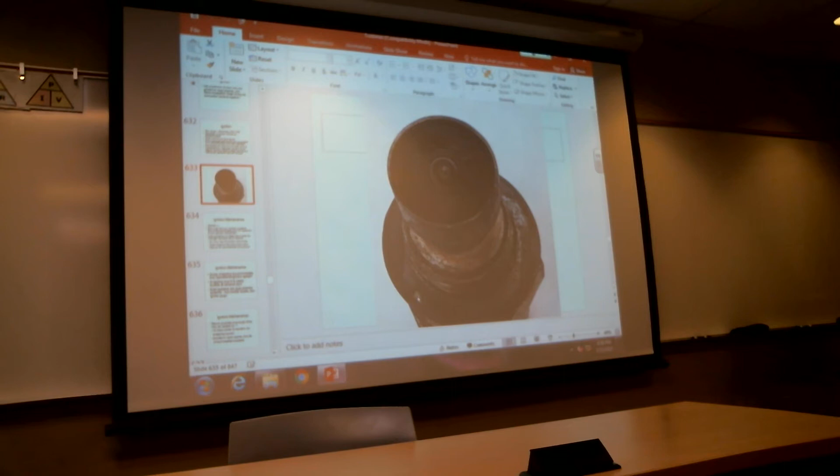They have this thing, some kind of a nebulous thing they call a punch list, and the punch list is all the little loose ends that didn't get done. And then we have a fire detection and smoke detection system in there that we can't control. We kind of need to, because I don't want to have the big red truck showing up every time we run an engine out there.

So we gotta hang a vest sock over it every time? Spray some jiffy foam over the sensors or something. I don't know, but they're telling me I have to call the dispatch people every time we run the engine, and I said that ain't gonna work.

So that's one of the problems we still got dangling with the test cell, but otherwise it looks like it's pretty well done. I'm anxious to get out there and kind of raise hell with it a little bit.

All right, so the last time we met, I had you think about this a little bit. It's good, I guess.

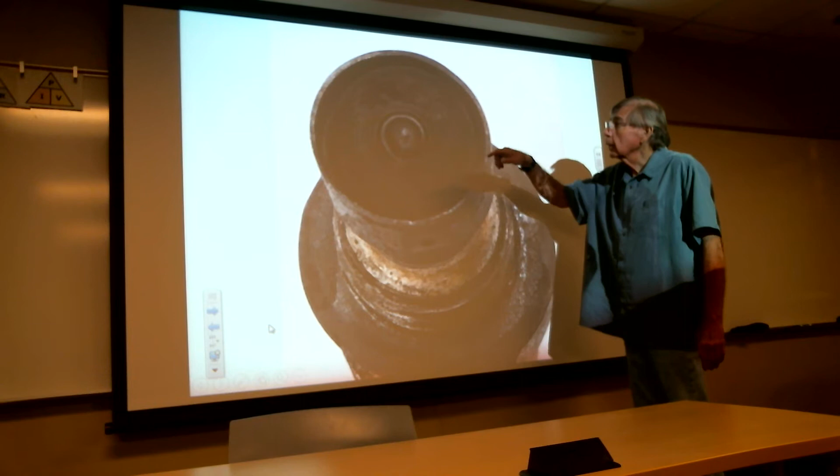So this is kind of like a cigar lighter inside your car. Push the thing in, it gets hot, pops out, and this whole coil here gets hot. These things get almost white hot, so they get a little bit hotter than the ones in your car.

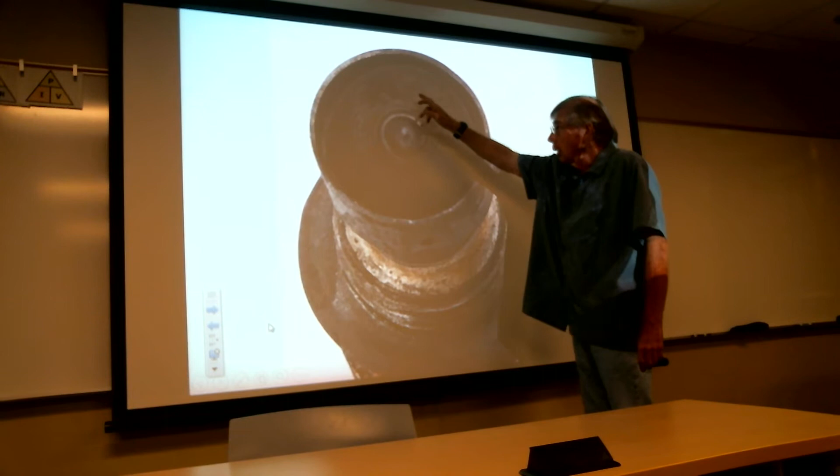But you can see the carbon up here, and this is just the solids in the fuel that eventually build up on there. It's kind of like I use the analogy of my oven at home. You cook a couple of chicken pot pies in my oven, and pretty soon it looks like that.

And so we have to get that stuff out of there, or you leave it in there, one or the other. And I choose not to because it just gets worse. But what happens is the more you bake this carbon, the harder it gets, the more glass-like it gets.

So the only way you get it out of there is with a caustic compound, and Easy-Off oven cleaner seems to work pretty good for that. You can soak the end of it in here and use a very light brush to break it and get it out of there. You might also use something with a little sharp fine point on it to break that stuff out.

But once this starts shorting out and killing the heat that happens across these coils, you start losing the starting efficiency. Because what you're trying to do is heat up the air that goes into the engine. You're also trying to cause the fuel to vaporize when it hits that hot middle. So those two things, this thing needs to work pretty efficiently.

The price of these things, as opposed to an igniter, about $650 for this little jet. $650, and it's only like that long. We got two of them in our PT6 outside here, and we started all of a sudden having a problem getting the engine started. Pulled these things out and found they were full of this carbon.

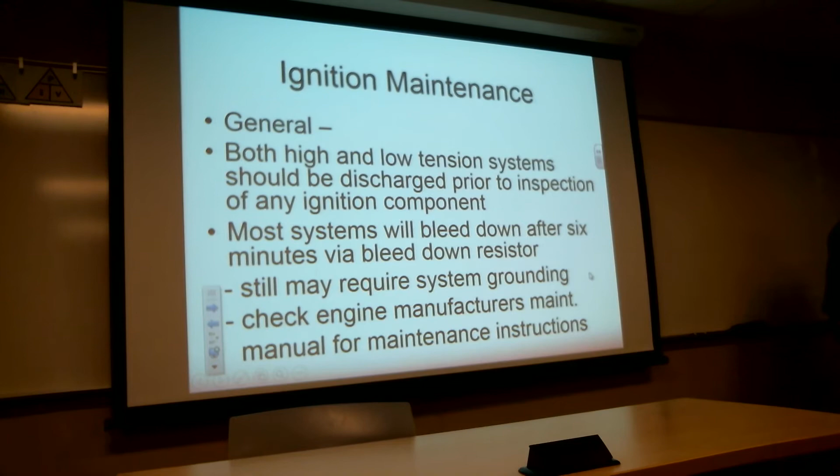So you always have maintenance manuals. Most manuals have a paper copy around somewhere, but most everything is also on hard drives or CDs. A lot of shops have the whole stack, with a CD player that takes 6 or 8 CDs. You just feed in the appropriate discs for the aircraft or engine, and you can jump between pages, usually with 2 or 3 monitors.

What you're looking for with igniters—our PT6 doesn't have the snapping sound, but normally you'll hear that snapping sound in the tailpipe. That ensures you know a spark is occurring in the back of the engine. You can hear it from the front too, but you're trying to listen through all the compressor blades and the rest of the engine. If you listen from the tailpipe end, you don't have all that stuff in the way—it's usually just a couple stages of turbines and a big can that echoes in there, so it's instantly recognizable as a snapping sound in the ignition system.

Most of these systems—our little engines out here are only single channel—but most have dual channel systems. That may be one exciter box with 2 channels, or 2 exciter boxes with 1 channel apiece. It depends on the airframer and how they wanted to set it up for a given engine and airframe installation.

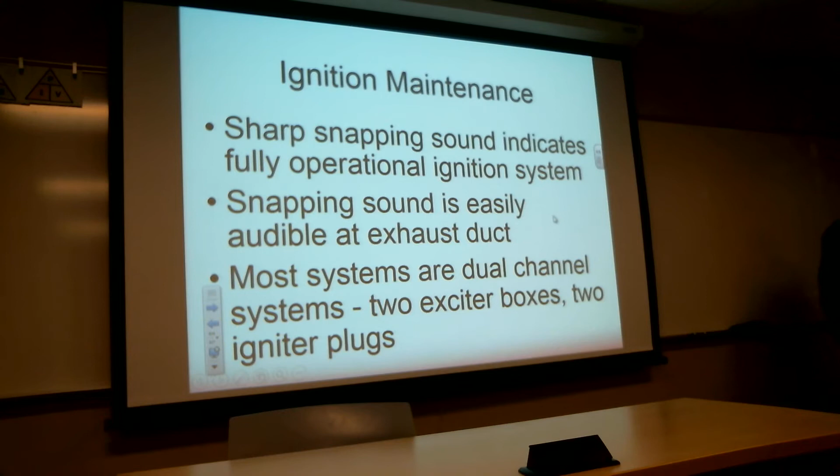Now when you troubleshoot these things, if you don't hear that snapping sound after ignition's been applied, you start upstream. First, is the breaker closed? Next, is the switch providing power to the exciter box? If there's no snapping sound, you just work your way downstream, following the power. If you don't have power to the exciter box, then you've got an airframe electrical issue, and you can track that down pretty easily.

But be sure the circuit breakers are set—you might want to pull the breaker out and reset it again. Breakers go bad. Pilots have a habit of fooling around with circuit breakers in flight; they like to pop them and stick them back in all the time. What does that do to the circuit breaker itself inside? How many of you have seen a circuit breaker taken apart? Okay, so explain to me what happens if you constantly set and reset a circuit breaker.

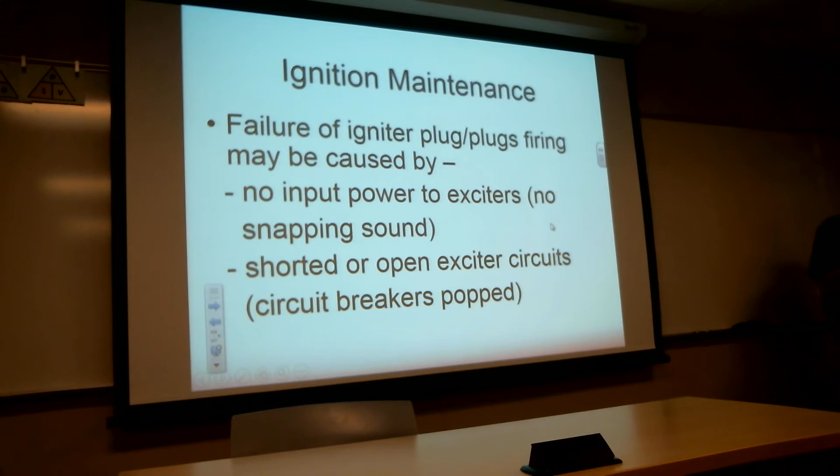But what's gonna happen is, one thing is you're gonna learn something by troubleshooting these things. You're also gonna save money by running these things to ground one issue at a time. And it doesn't take that long with this stuff. It all screws together, it's got nuts on it, and it goes together pretty easily.

All right, so the igniters. Again, the percentage of probability that you've got an igniter issue is almost 100%.

So you want to check those first? Well, you don't know if you've got power to the exciter, so check the breaker, make sure you got power to the exciter first. Yeah, so that'd be the first thing you do. The next thing then would be the igniter itself.

Of course, if you have a dual channel, one's working, one's not, swap them. And that's gonna tell the tale right there.

Now there's something else I should tell you about, it's called sunshine and fresh air. For no good reason, a lot of times you'll touch something, take it apart, it looks fine, and you put it back together, and it works perfect. A little sunshine and fresh air sometimes can fix a lot of things, but it's kind of maddening because these transient problems are almost certain to show up again at some point. So you haven't really fixed anything, but you made it work. So be careful doing that, try not to fall into that trap.

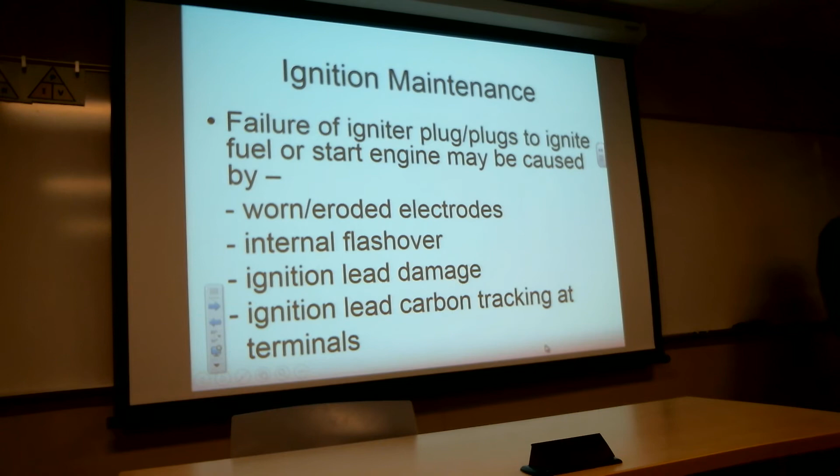Okay. So cleaning and inspection of the ignition ring. The output wells of the exciter, they have to be cleaned.

What would you use to clean this stuff? So you got a little grease in there. Maybe you went to Popeyes and had chicken for lunch and got greasy fingers that put all this stuff together. What would you use? What kind of compound would you use to neutralize the grease and get it out?

Alcohol? Alcohol, not so much. You can use alcohol, but I'll tell you what happens with alcohol as it flashes off and evaporates. What does it leave behind? Everything you just tried to get away, everything you're trying to get rid of. And even if you get it pretty clean, it's going to cause condensation, and you don't want moisture sitting there. You want to have it clean and dry when you move away from it.

So you can use acetone, MEK, electro contact cleaner, anything like that works just fine. Q-tips, you all know what Q-tips are? Cotton swabs, clean your ears with them. So you use a cotton swab down in there with some of this compound, and it'll clean it right out.

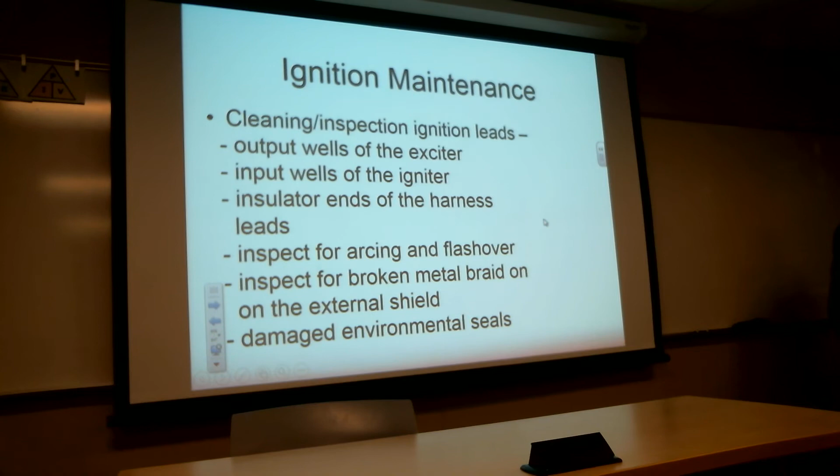Now the exciters and the harnesses, there's nothing there that's repairable by mechanics except by certified repair stations. They take these things apart, put them back together, replace the parts in them, overhaul them, all of that, but there are no line replaceable units inside of these things.

Okay? Keep your damn screwdrivers out of them.

So the igniter plugs, they're replaced when they're worn or no longer functioning. Usually, if there's a dual channel setup on the engine, they'll run them right till one quits, and then they'll replace it. They won't replace them in pairs. They'll run them until one quits, and then they'll let the other one quit in due time.

Again, the wear and erosion limits are set by the manufacturers of not only the engines. You'll find these repair schemes or the limits, also in the component maintenance manuals. So Unison, Champion, Autolite, all of those companies make these igniters, and they all have their own specific limits for wear and usefulness.

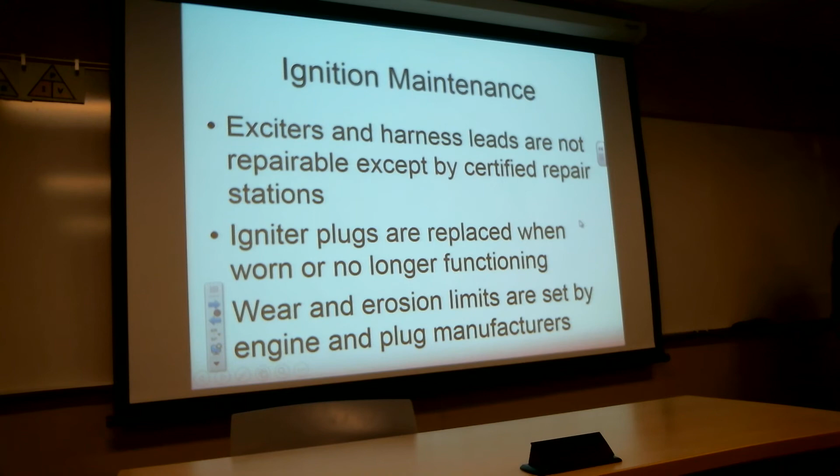Okay, glow plug maintenance. The only way you can check to see if the glow plug's working, since you can't hear it switch and snap, is to pull it out and connect it to the wire.

Now, these aren't going to have a wire that looks like a harness wire for a high tension or low tension spark plug. This is just typically going to be a shielded wire, 18 gauge, maybe 16 gauge, that goes out and feeds voltage to the glow plug. And it comes from a glow plug controller. So the controller switches on, and it will run the glow plug for a period of time.

Everyone's a little different, they'll run it for 30, 40 seconds, and then shut it off. It'll go off for 30, 40 seconds, and then come back on again, and that's called a duty cycle.

Okay, so you remove the plug from the engine, and then you reinstall the ignition lead and switch on the ignition with the plug hanging outside the engine. So all you're going to be looking for is to see that the plug operates.

Okay, so these things should get hot within about 8 to 10 seconds, and then you shut it off. You don't want to run these any longer than you have to. These things will get almost white hot, but you don't want to run the temperature that high.

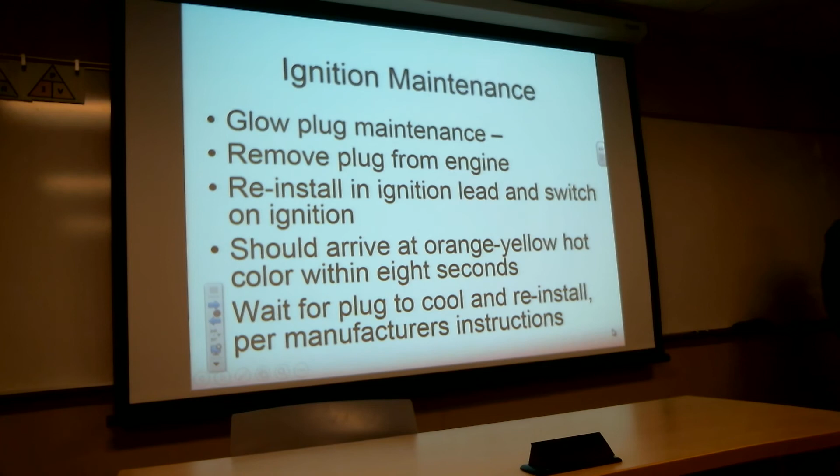Okay, the last slide here. I'm going to show you a little video. Did I show you guys a video in the ignitions class the other night, CFM56? You probably remember. I'll go dig that out real quick, and I'll show you a little video before we close it down for a little break here.

So the point here is that if you drop one of these spark plugs, and these are the igniters, not the glow plugs, if you drop one of these things, you're probably going to have a problem with it down the road. And if you have a problem with it down the road, that means the aircraft's probably not going to launch on time. You take one of these things and it hits the floor, you might as well just scrap it. Okay? They're expensive, but you might as well just scrap it because there's a very good chance the insulator has been cracked inside the spark plug.

And it's the same with a spark plug for a reciprocating engine. It doesn't matter. What's going to happen is if you crack that insulator, you're not going to have the correct voltage delivered to the electrode to create the spark that you're looking for.

Okay. So let me go get that video, and I'll run that off real quick. It's like 20 minutes or something, maybe less. But it's about the CFM56 ignition system.

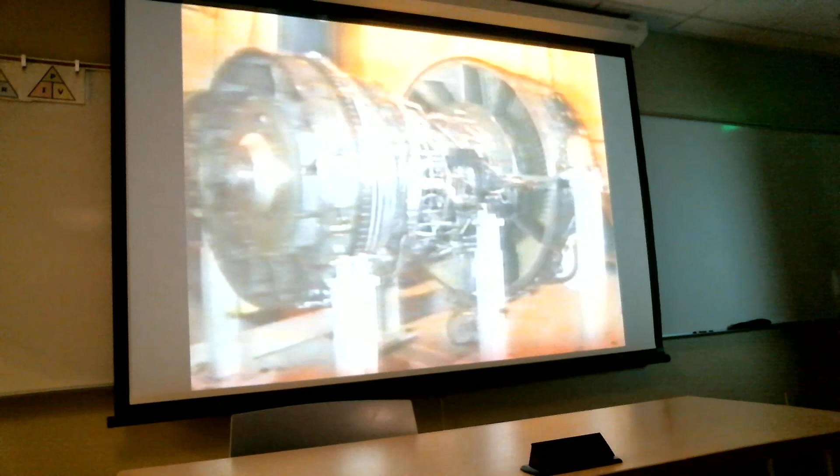These engines are in quite a number of Boeings and Airbuses, almost all the 737s anymore. This program details the removal and installation of the CFM56 ignition system. Both Type 4 and Type 3 will be described.

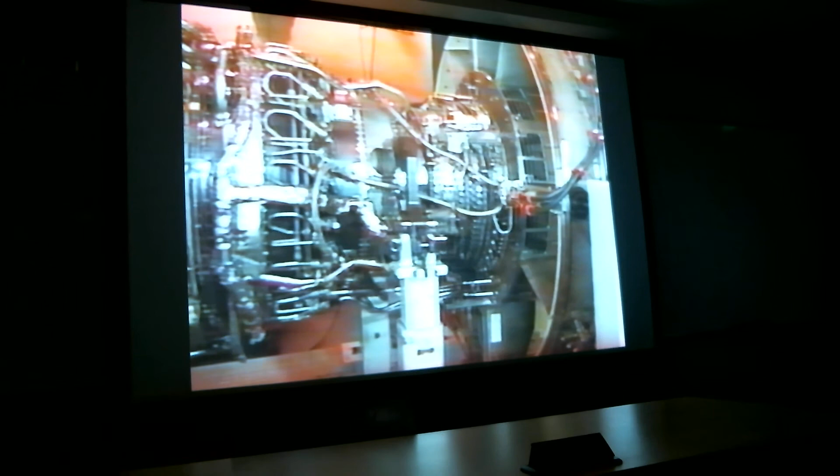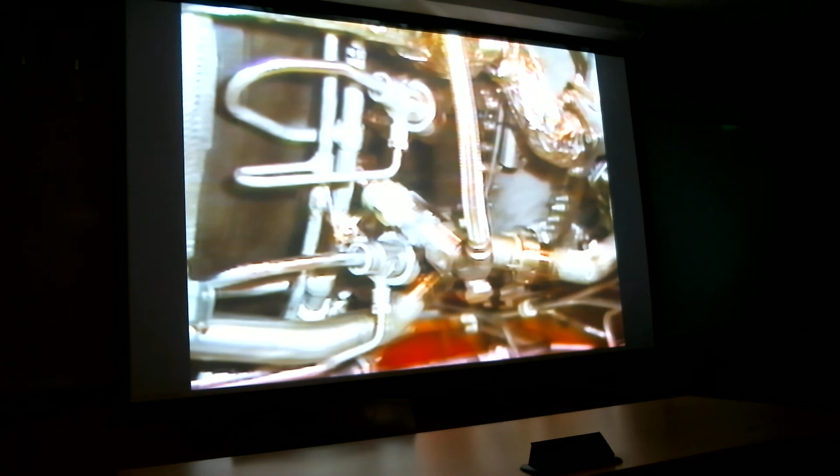Before disassembly, ensure the system has been deactivated for at least 5 minutes. Remove the cooling shroud clamp and the cooling shroud. Once the cooling shroud has been removed, the ignition lead igniter plug interface will be exposed. Then loosen the ignition lead coupling nut and completely disengage it from the igniter plug.

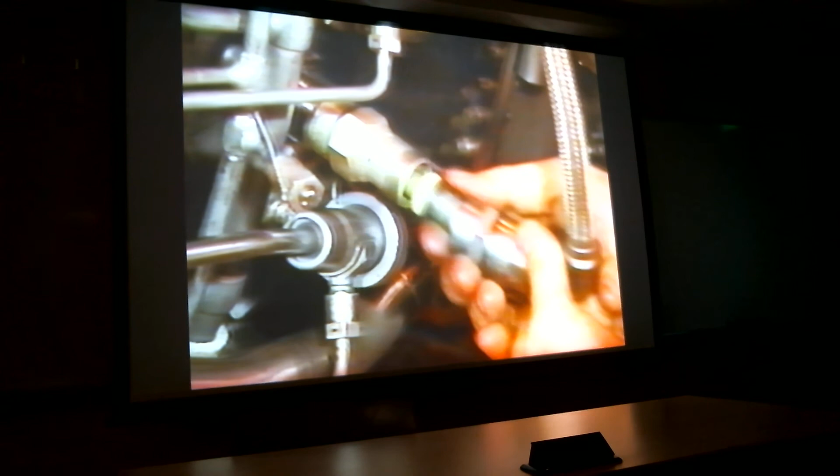Next, gently remove the ignition lead from the plug. Be careful not to bend or kink the lead excessively during removal, as this could damage the ignition lead or plug. Then, with the lead completely disengaged from the igniter plug, unseat the igniter plug from the Type 4 adapter bushing.

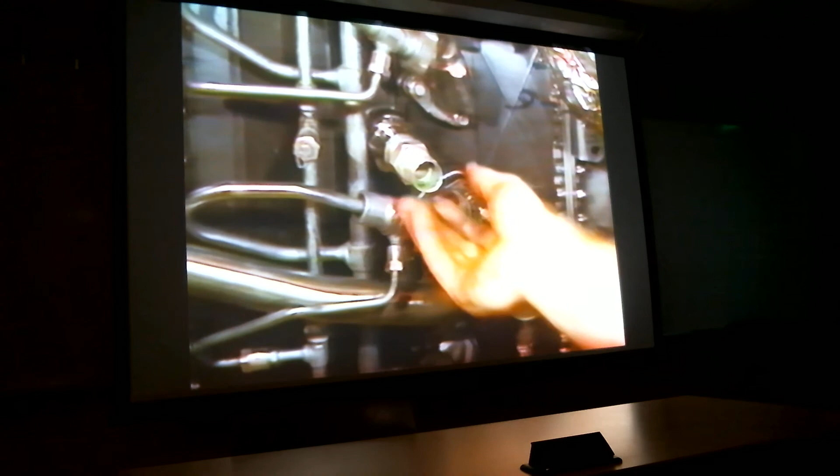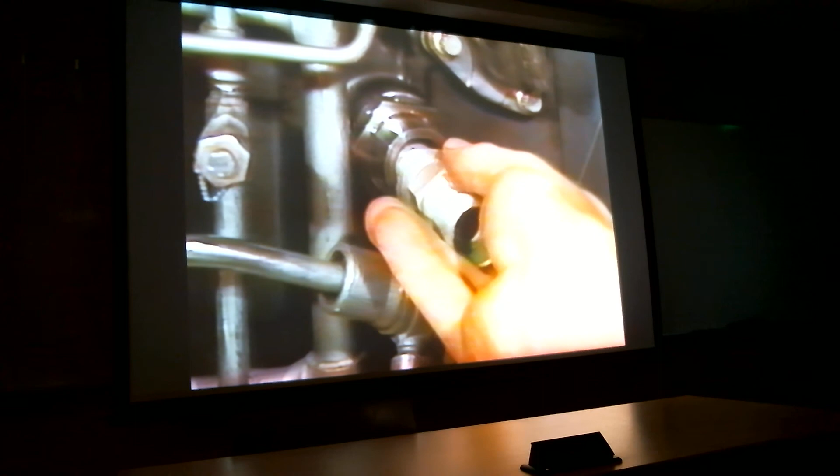Do not remove the Type 4 adapter bushing. It should remain lock-wired and secured to the combustion case. The Type 4 adapter bushing is only removed if the igniter plug cannot be unseated from the bushing. The original adapter bushing, along with the equivalent shims between the bushing and the combustion case, should be used, or igniter immersion depth will be affected.

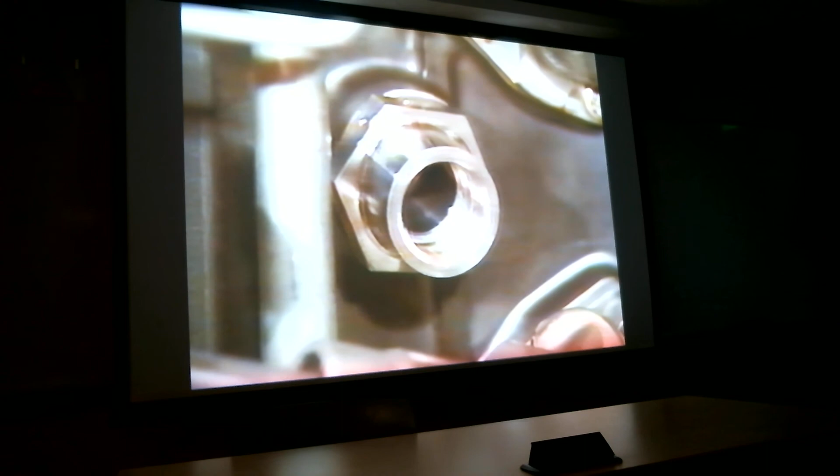Ensure that the gasket between the igniter plug and adapter bushing came off with the plug.

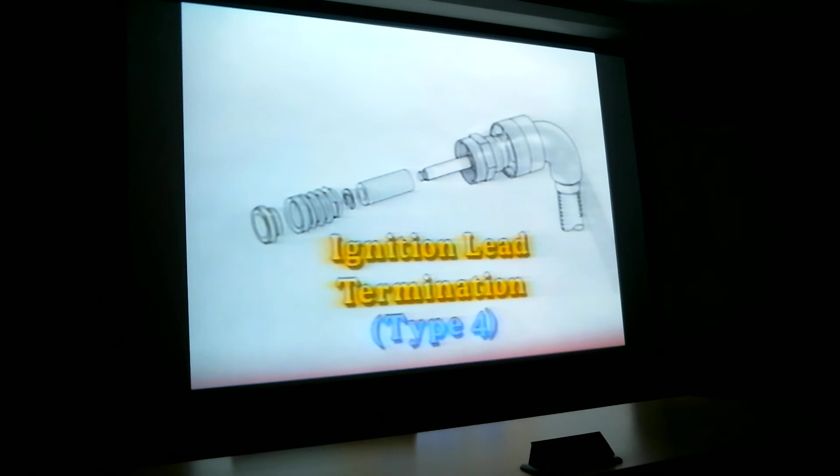Proper installation of the igniter plug is very important. Since it is a wear-out item, it is the most often changed ignition system component. This system can be assembled many different ways. However, only one, described later in this program, is correct and ensures proper operation.

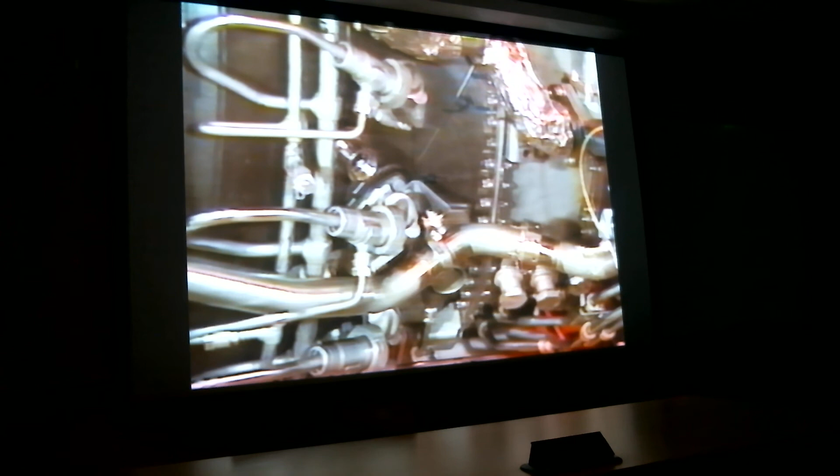Before beginning installation, have all of the needed hardware and consumables available: an igniter plug with captive gasket installed, a new chamfered silicone seal, and anti-seize grease. Be sure that hands, hardware, and tools are free from any dirt, etc. The conditions under which the ignition system operates make it extremely sensitive to any type of contamination.

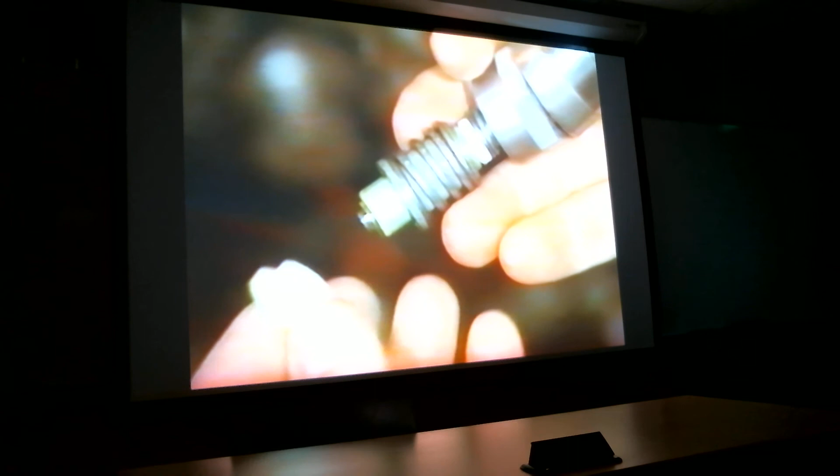First, remove the chamfered silicone seal from the ignition lead insulator, and be sure that the seal load spring remains in place on the lead. Then install the new chamfered silicone seal on the ignition lead insulator. Verify the proper orientation of the seal load spring and the seal.

Note: be sure to install the chamfered silicone seal before applying any anti-seize grease to ensure cleanliness of the seal and igniter terminal well area.

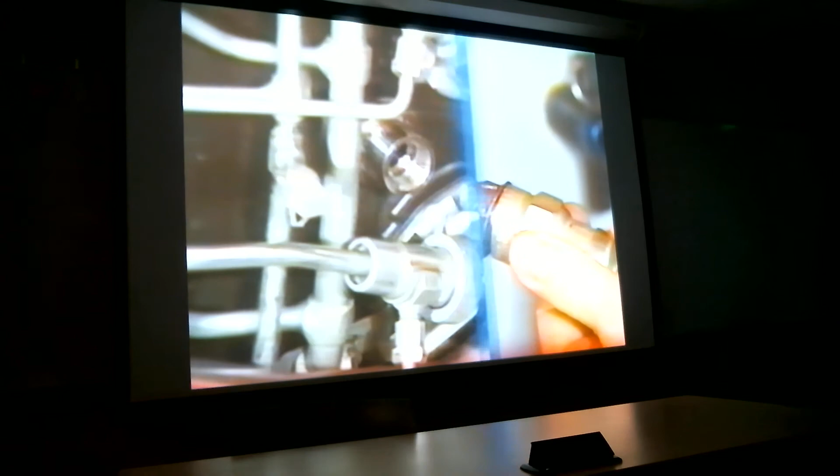Next, coat the threads of the igniter plug that mate with the Type 4 adapter bushing with anti-seize grease. Then thread the igniter plug by hand into the bushing until snug. Torque the igniter plug to the torque value specified in the maintenance manual.

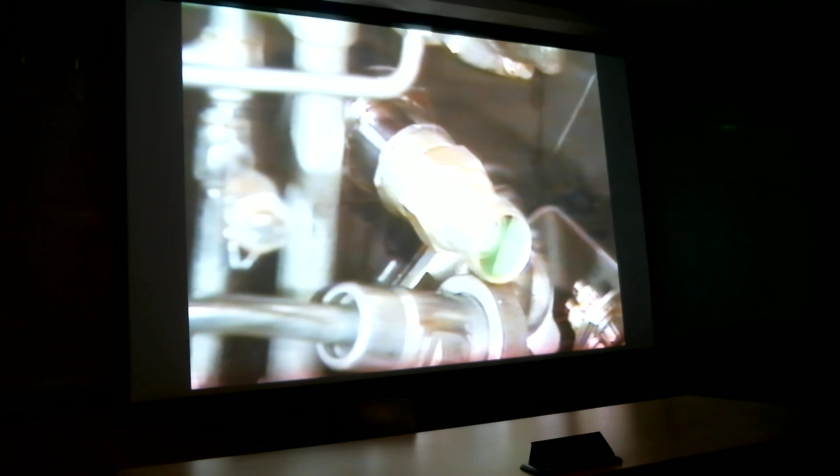Anti-seize grease is not used at the lead plug interface because of the threat of contamination to the Type 4 termination.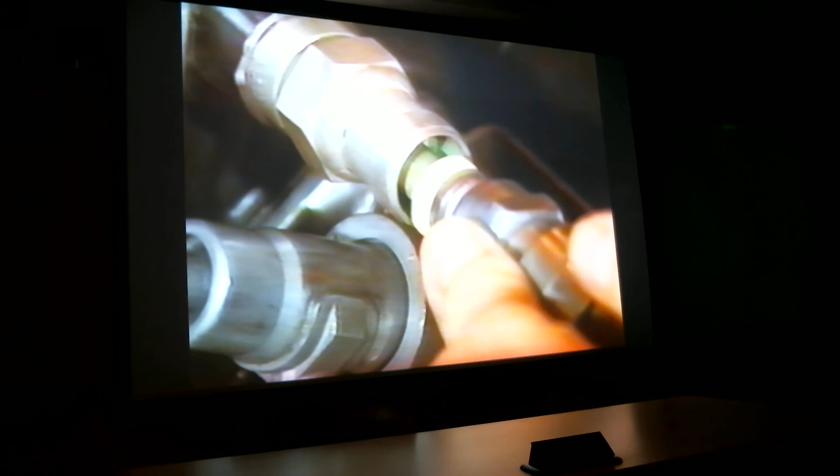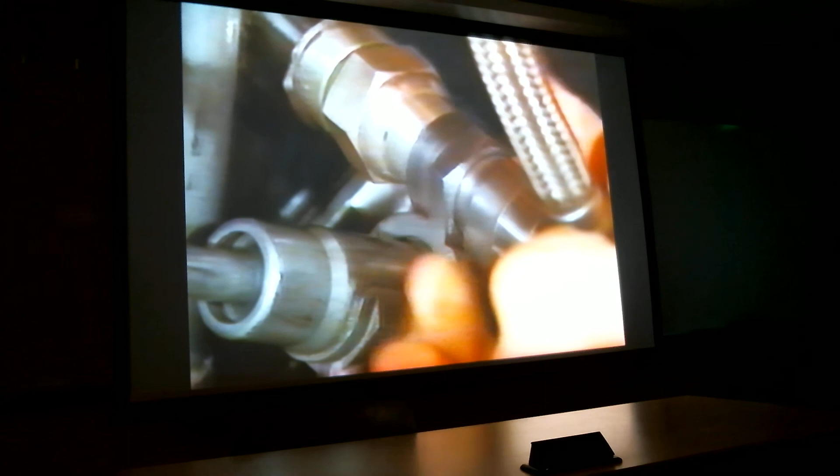Gently install the ignition lead into the igniter plug. Thread the ignition lead coupling nut onto the plug by hand until snug. Then torque the lead coupling nut to the torque value specified in the maintenance manual. Finally, install the cooling shroud and clamp into place.

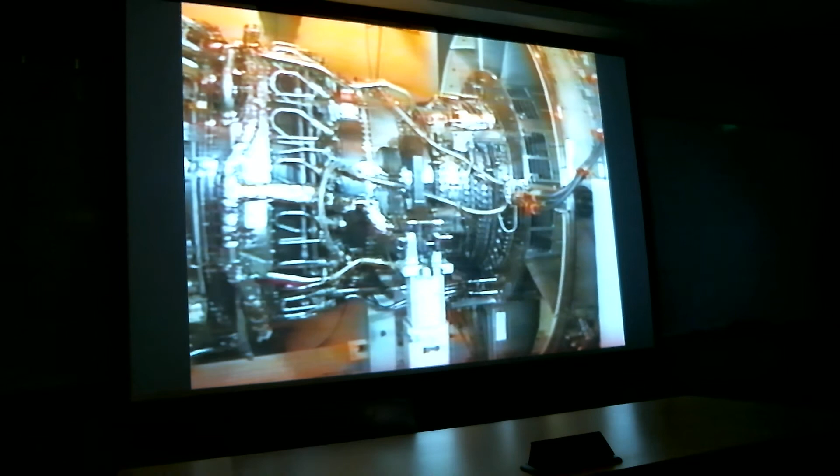For the removal of the Type 3 igniter plug, first cut the lock wire from the ignition lead coupling nut to the adjacent fuel nozzle. Unseat the ignition lead coupling nut from the combustion case and remove it completely.

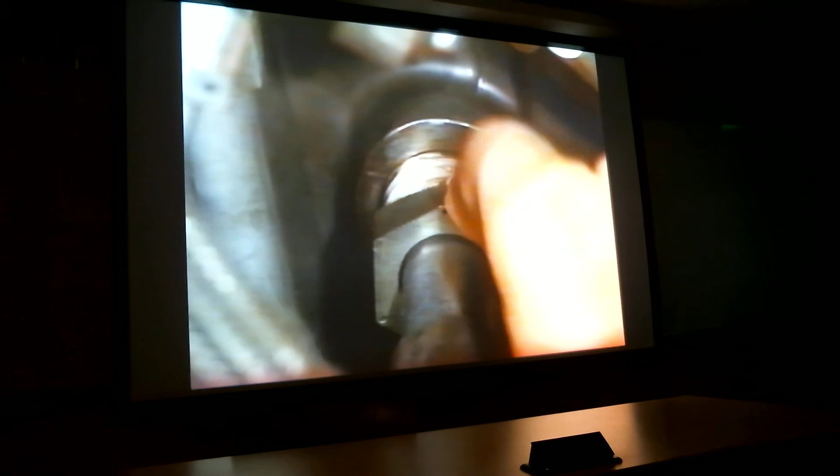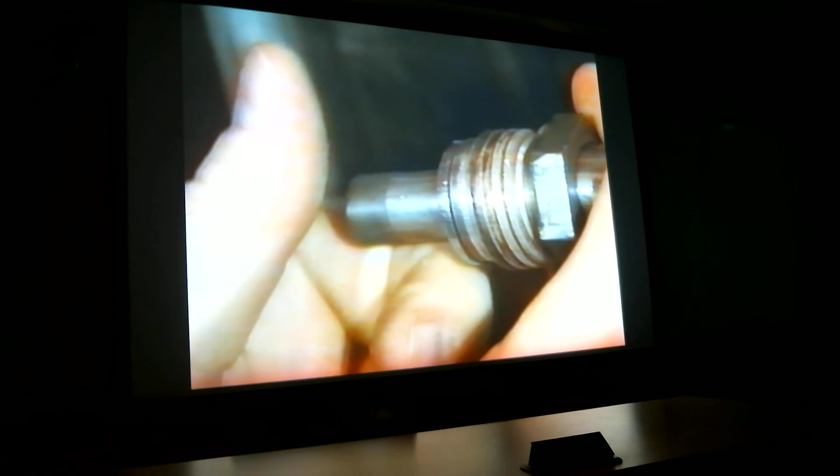Gently remove the lead plug combination from the combustion case. Be careful that the plug does not fall out of the ignition lead. The igniter plug is held in place by the friction force between the pin and socket connection. In the event of a plug or lead malfunction, removal of the igniter plug may be difficult. Further troubleshooting may be necessary.

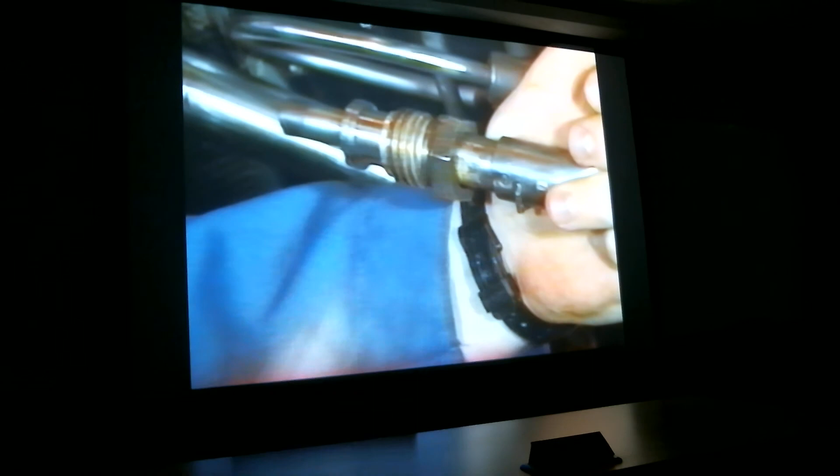Install the Type 3 igniter plug into the ignition lead and carefully coat the threads of the ignition lead liberally with anti-seize grease. Then install the ignition lead coupling nut into the combustion case and torque to the value specified in the maintenance manual. Then safety wire the coupling nut to the adjacent fuel nozzle.

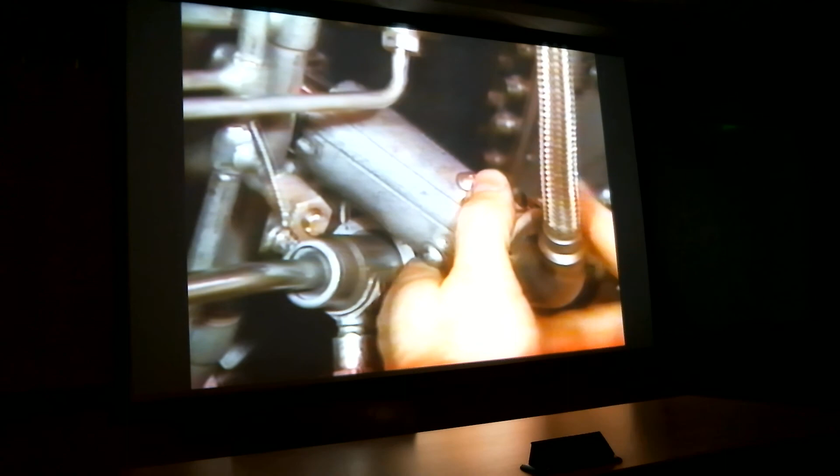For Type 4, remove the cooling shroud clamp and shroud from the igniter plug ignition lead junction. Then remove the coupling nuts on the exciter end of the lead and on the igniter plug end of the lead.

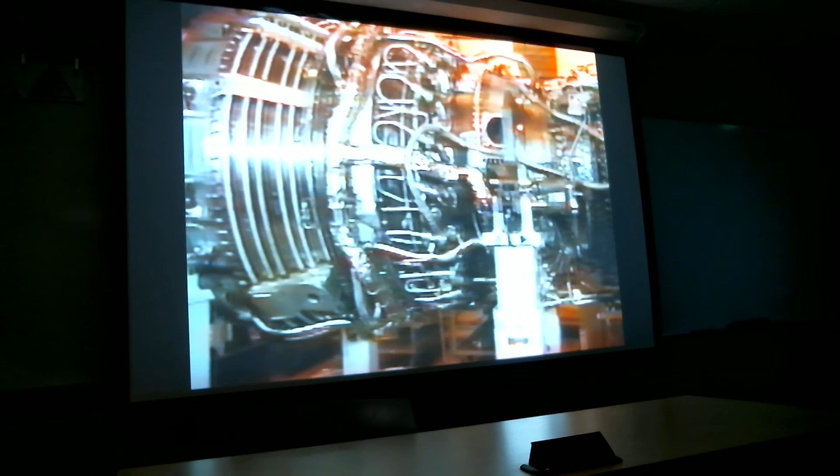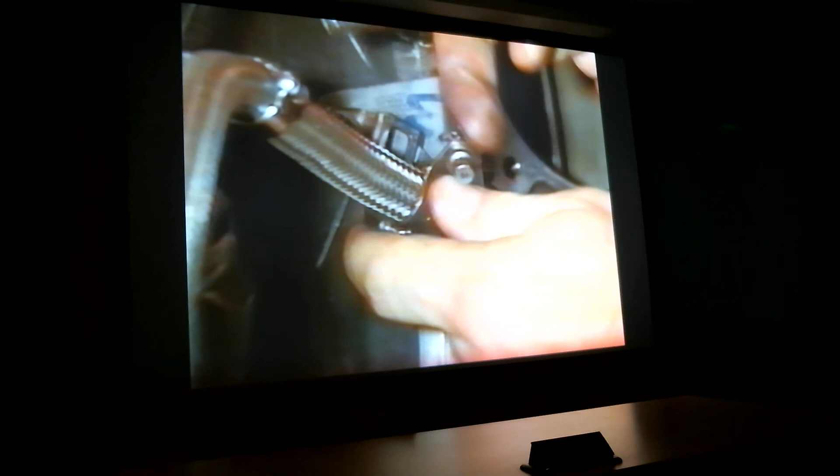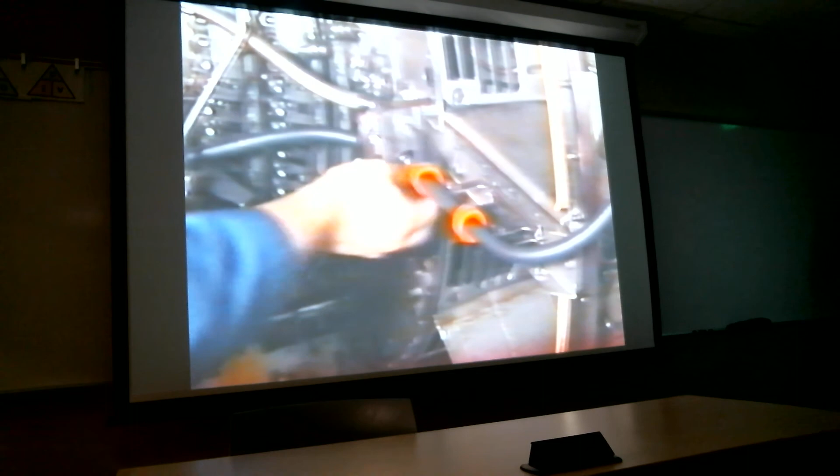Open all of the brackets holding the lead in place. Loosen and remove the bolts holding the cooling air pickup junction plate. Then carefully pull the ignition lead through the fan frame. The ignition lead can then be removed from all of the other brackets and removed from the engine.

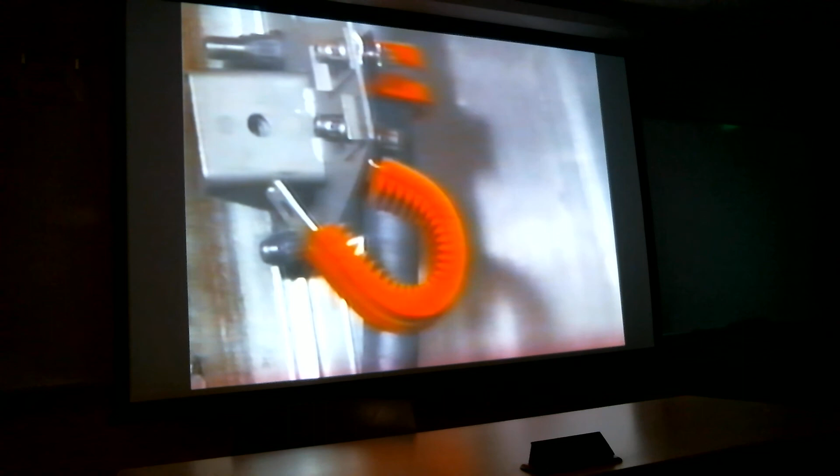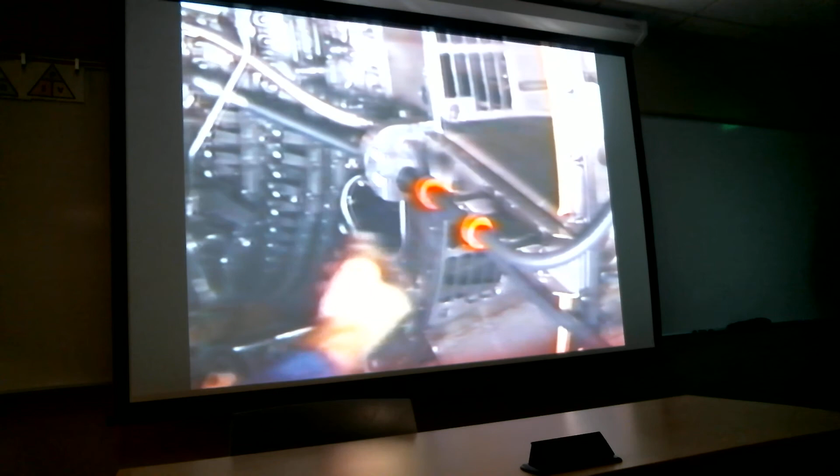When installing the Type 3 or Type 4 ignition leads, first make sure all brackets are in place and in good condition. Then insert the exciter end of the ignition lead through the fan frame strut and carefully feed the lead through the strut until the air adapter seats. Then tighten the clamps. Next, install the bolt and retaining plate that hold the air adapter in place on the number 3 fan frame strut.

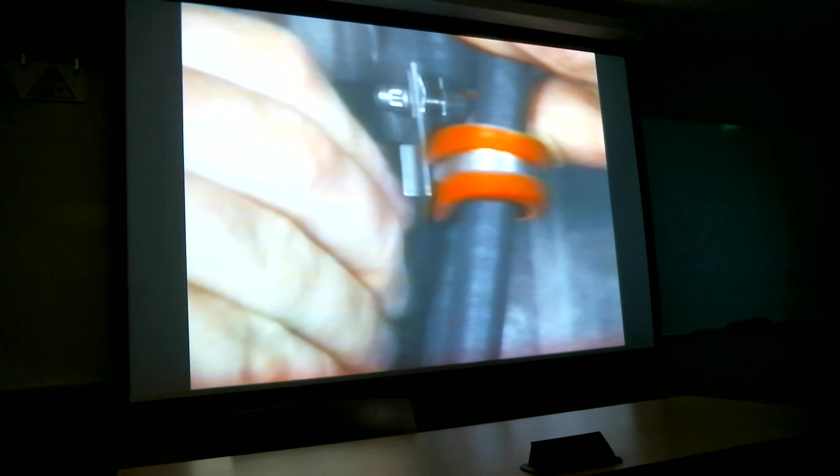Run the lead in the proper clamps as specified in the maintenance manual. Next, gently slip the exciter end of the lead into the exciter connector and torque the coupling nut to the value specified in the maintenance manual.

On the Type 4 ignition lead at the igniter plug end, replace the chamfered silicone seal. Verify proper orientation of the seal load spring and seal before installing the lead to the plug. Slide the cooling shroud clamp onto the ignition lead. Note, do not apply anti-seize grease to the plug lead interface threads.

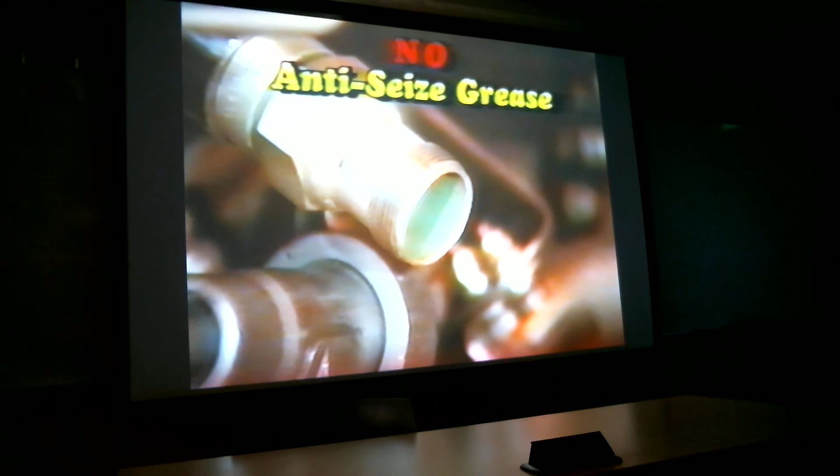Next, gently slide the igniter plug end of the lead into the plug. Thread the ignition lead coupling nut onto the plug by hand until snug. Next, torque the lead coupling nut to the torque value specified in the maintenance manual. Then slide the clamp down over the lead and install the cooling shroud. Then tighten the clamp.

On the Type 3 ignition lead, the plug is inserted into the lead. Then, no anti-seize grease is applied to the ignition lead threads. The lead coupling nut should be torqued to the value specified in the maintenance manual.

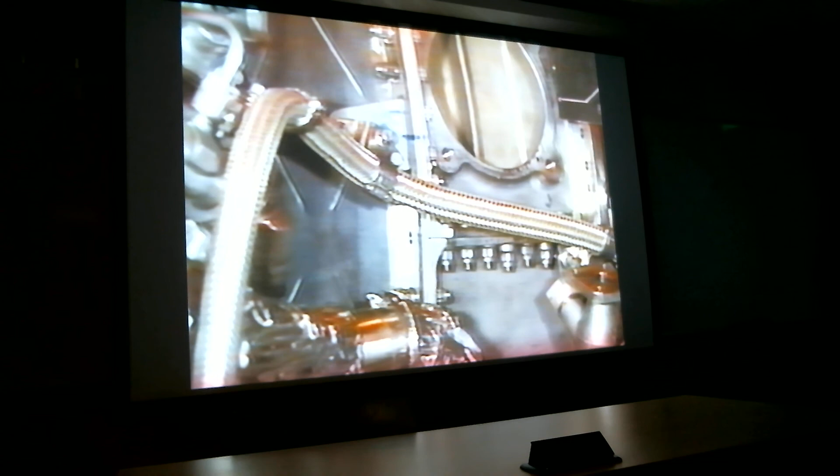For either Type 3 or Type 4, slide the lead in the mounting brackets until optimum clearance from the engine hardware is obtained. Note, the left-hand lead has in the past had problems with chafing on the 2 o'clock VSV actuator bell crank. Verify that this area is not chafing. Once optimum clearance between the lead and other engine hardware is obtained, torque the ignition lead brackets to the values specified in the maintenance manual.

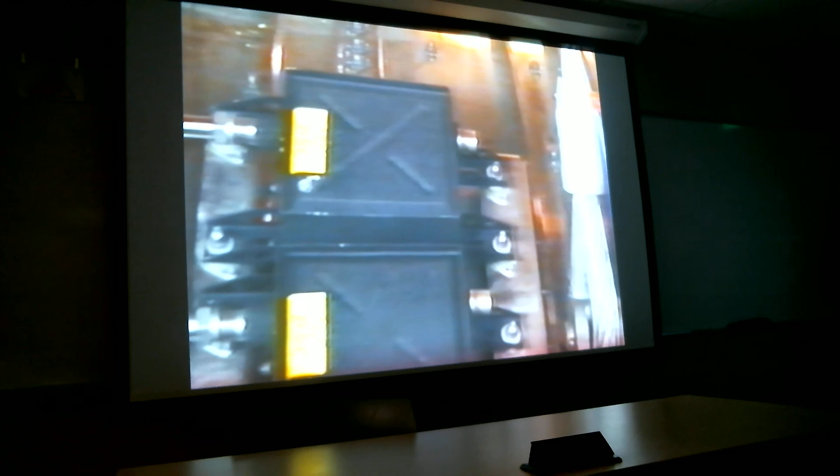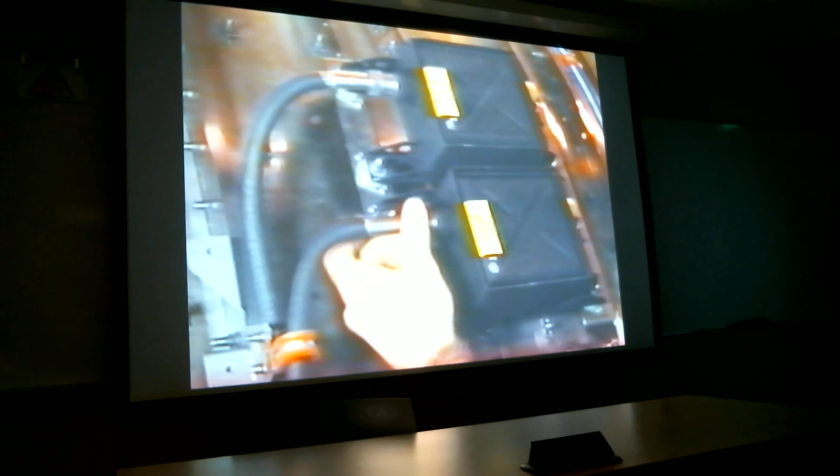Both low-energy and high-energy exciters are installed and removed from the engine in the same manner. Disconnect the power supply cable from the connector which is on the forward side of the exciter. Place a protective cap on both the cable and the connector. Then, disconnect the ignition lead from the connector on the aft side of the exciter. And cap the lead and the connector.

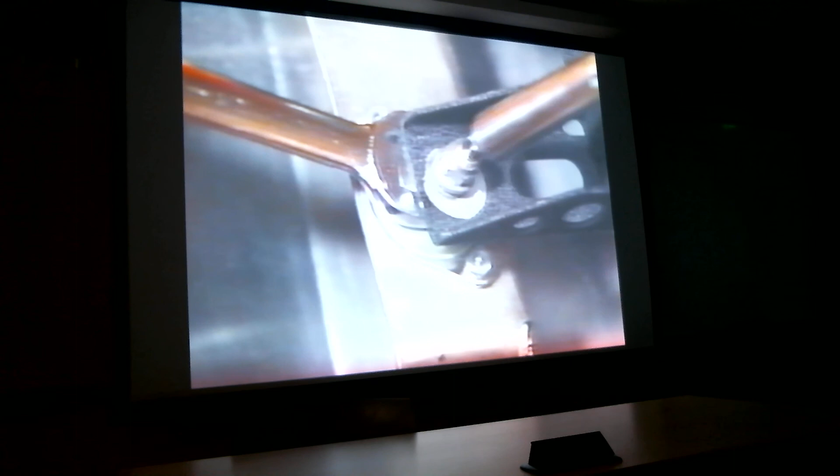Hold the stud in the resilient mount with an open-ended wrench on the stud flat so as to prevent the stud from turning. After removing the nuts and washers that secure the exciter to the bracket, remove the exciter.

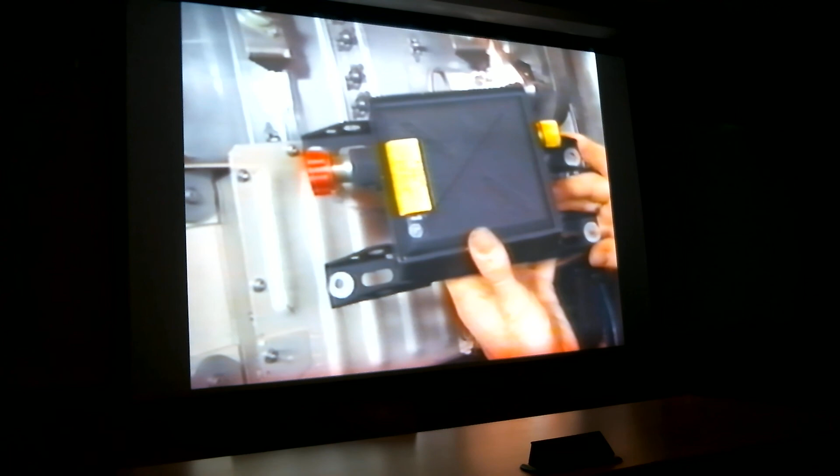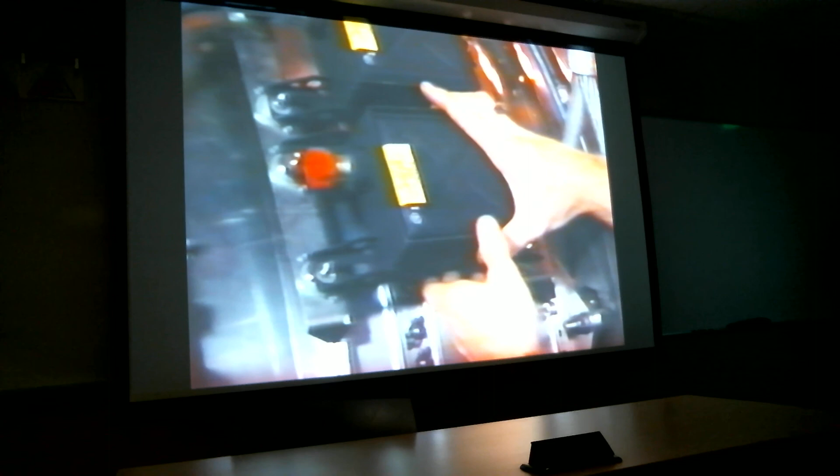To install the exciter, make sure the circuit breaker is open. Lightly coat the mounting bracket stud with graphite grease - those are shock mounts there - and place the exciter on the studs. If you don't hold those when you take the nut off, you can twist the stud right out of the shock mount. Secure the studs with nuts and washers using an open-ended flat wrench to keep the stud from turning.

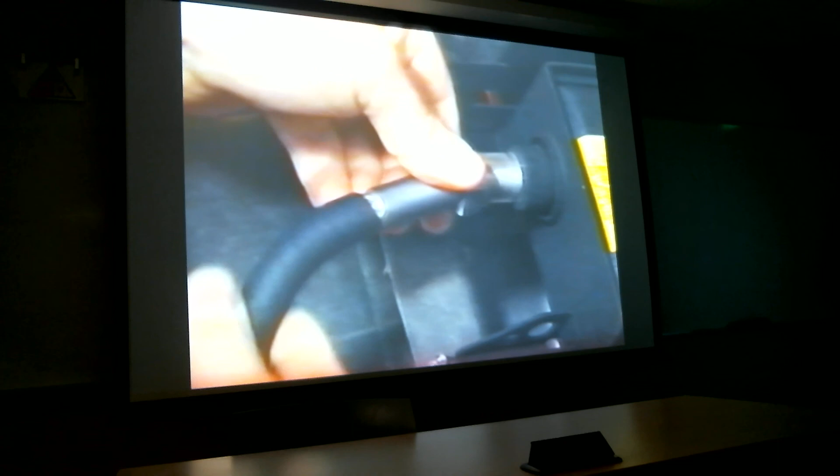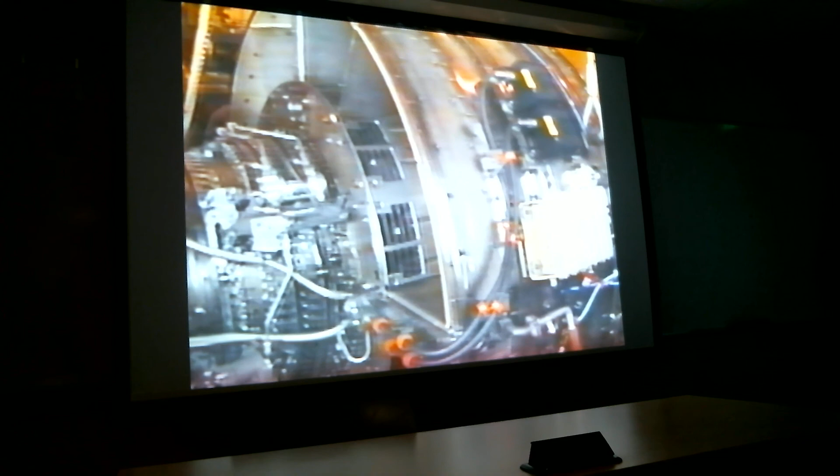Connect the ignition lead to the connector on the aft side of the exciter and tighten. Make sure that the ground strap is connected. Connect the power supply to the connector on the forward side of the exciter and tighten. This concludes the removal and installation of the components of the ignition system. For more specific information, refer to the appropriate maintenance manual.

So how many of you think you could do that? Hopefully everyone, hopefully every hand goes up here, because it just isn't that hard. It's a task, it's a pretty common task. You don't do one every day, but it's a pretty common task that you might do. And you can see it's not that hard, but there's a little procedure to it, some things you have to remember.

You go to the manual and go through it, one step right after another. A lot of places use what they call job cards - a job card for replacing the igniter has all those steps on it, and you make a stamp or electronically mark it. But with something like this, at some point you're going to remember what the torques are, you're going to remember kind of what the procedure is. But the one thing I can't impress on you enough is keep that anti-seize away from the electrical side, or otherwise you're going to have sparks going everywhere. That's not going to be very helpful.